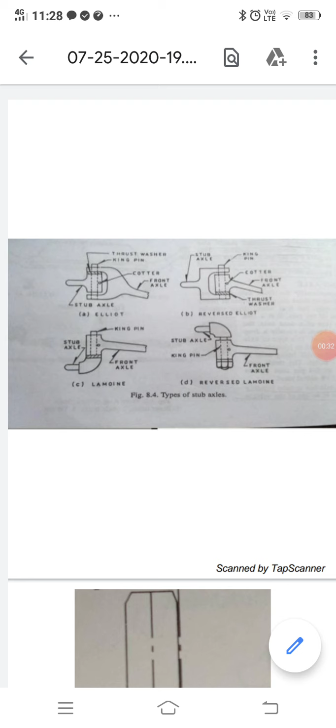Today my discussion topic is the front axle, stub axles in front axle. In the previous lecture I discussed the topic of front axle, what are the functions of the front axle, and what are the types of the front axle. But now our today's topic is basically on the

types of stub axles and also the steering geometry. Steering geometry means some parameters related to steering geometry, like camber, caster, kingpin inclination angles, curved radius, something like that.

Okay, so now today I am going to start about the stub axle, types of stub axle. So you know what is stub axle? The stub axle is basically which connects the front axle to the wheels, or front axle to the front wheels.

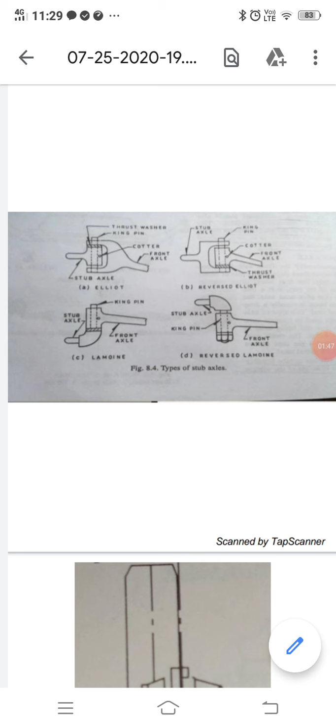So this is the function of the stub axles, main function of the stub axles, and it is not used in the rear axle. It is only used in case of front axle, and we are using this stub axle in four types. Number one is Elliot type stub axle, second one is reverse Elliot type stub axle, third one is Lamoine type stub axle, and fourth one is the reverse Lamoine type of stub axles. So these are the types of the stub axles.

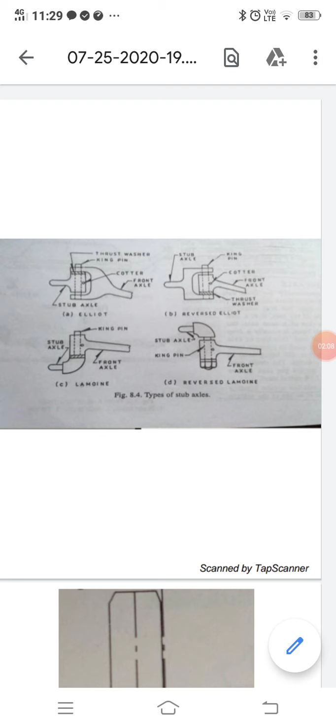In Elliott type stub axles - this is the Elliott type of stub axle - the yoke for the kingpin spindle is located on the ends of the I-beam. It is only located at one end of the I-beam, and the axle ends are forked to hold the steering knuckle extensions between them.

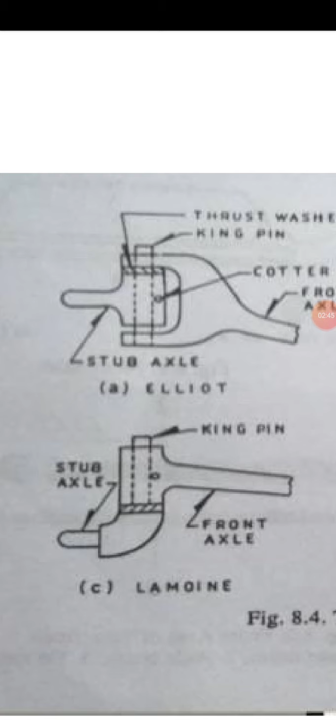And this is the Elliott type of stub axle, and this one is the reverse Elliott, just opposite to the Elliott type of stub axle.

Have you seen any difference between the two? There is some difference because of the kingpin location and also the stub axle location with the kingpin. In case of Elliott type stub axle, the thrust washer is placed at the upper portion of the stub axle, but in case of reverse Elliott type, the thrust washer is placed below. Also, in the Elliott type, the stub axle is placed in between the front axle, and in case of reverse Elliott type, the front axle is placed in between the stub axle. This is the basic or fundamental difference between the Elliott type of stub axle and the reverse Elliott type of stub axle.

The reverse Elliott type of stub axle has the spindle yoke hinged on the spindle itself, instead of on the axle. As I told you earlier, this is the difference - the stub axle is placed in between the front axle in the Elliott type, and in case of reverse Elliott type, the front axle is placed in between the stub axles.

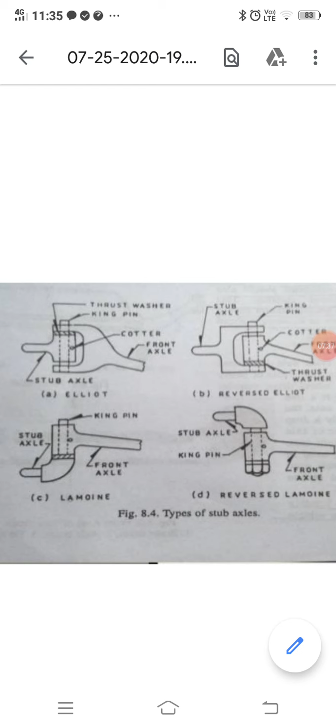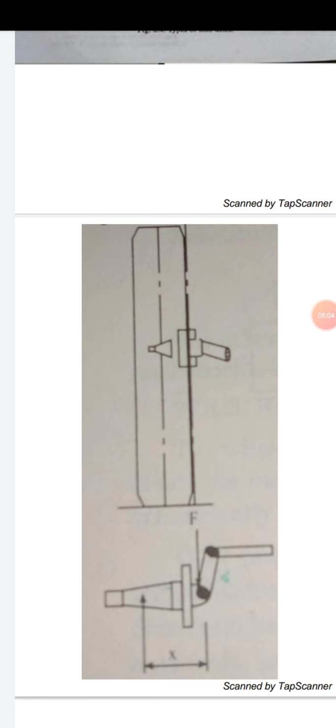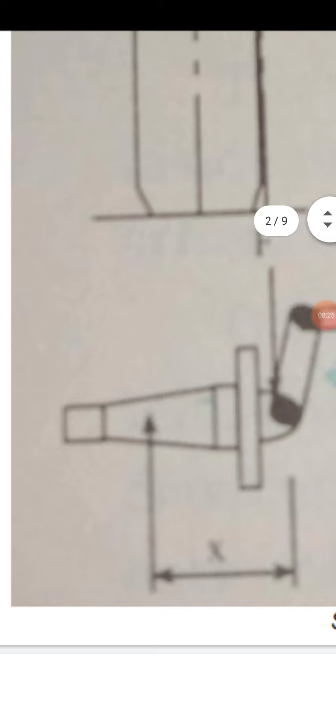Now I am going to discuss the center point steering system. From this figure you can see the vertical wheel and kingpin arrangement. This is the vertical axis of the wheel, and this is the kingpin angle, and this one is the stub axle. So these are the center point steering system.

This center point steering system has some disadvantages also, because nowadays the center point steering system is one kind of obsolete type of steering system.

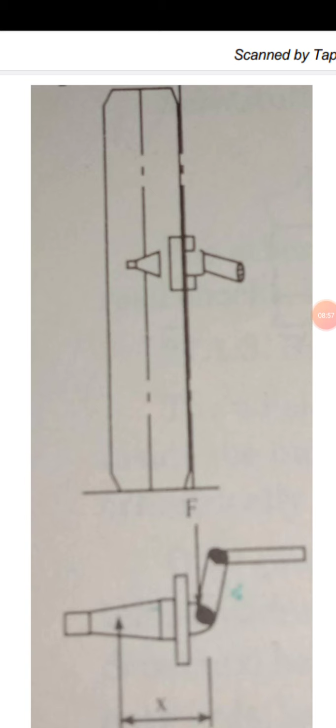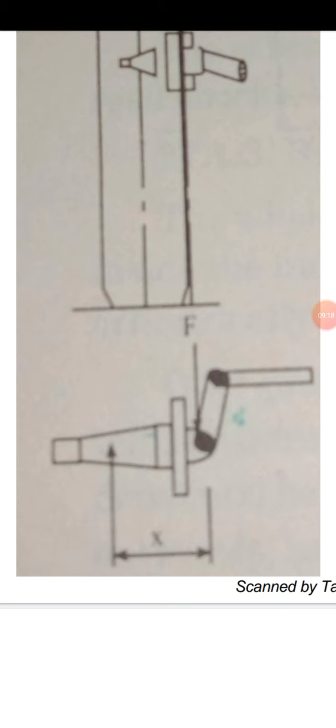The wheels are forced or pushed by the force, which is opposed by the resistance force R. This R is not captured by this picture. This is force F, and this downward force is the reaction force, or R.

These two forces cause a couple force obviously, and the magnitude of this couple force becomes very large when the front brakes are applied. In that case, a very large magnitude of couple force is generated, and this may be the cause of steering distortion or some dimensional problems, or some linkage problems may occur with the use of the central point steering system.

One more thing is that the steering wheel becomes heavy or stiff due to the distance between the kingpin and the wheel center, and the wheel moves in an arc of radius, which is denoted here by x.

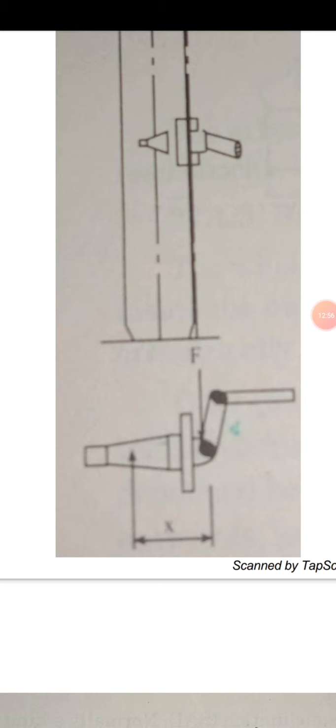So that is a very important thing. The concept of camber and caster comes from the center point steering system. So if we have to overcome such kind of problems, we have to go for camber or the caster angle. Now this is the wheel camber.

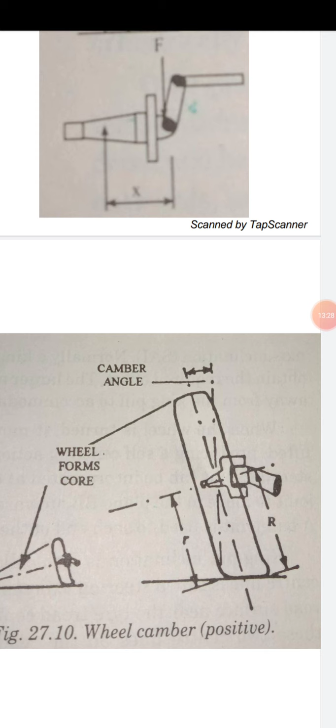What is camber angle? From the picture you can see the angle between the vertical line of the axis, meaning the y axis, and the tire center line, meaning the tire vertical line with the tire center line. This angle is known as the camber angle.

Now we will discuss more about the camber angle. If you see any car or vehicle, not obviously a two-wheeler, you can see the wheels are something tilted, but not too much tilted, not like this picture. But if you observe a vehicle's wheel, you can obviously see some inclination must be there. So that inclination angle is the camber angle.

And sometimes toe-in toe-out is also provided with the wheels, but toe-in toe-out is not a part of the camber angle. Camber angle is only considered as the vertical axis of the wheel with the center line of the wheel axis.

The offset of the stub axle tilts the wheel outward at the top, meaning it is outward at the top, not in the front. In case of the front, it will be toe-in or toe-out.

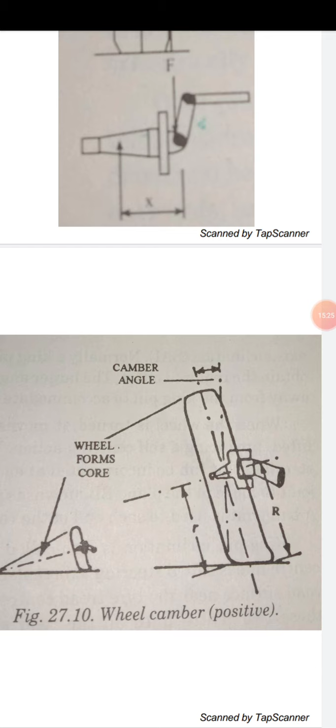There are two types of camber: positive camber and negative camber. The outward inclination of the wheel at the top, considered at the top portion of the vehicle, is called the positive camber, and inward inclination is called the negative camber.

The camber prevents the top of the wheels from tilting inward much due to excessive load or play in the kingpin and wheel bearings. Camber on any automobile is the result of front end geometry.

Incorrect camber is usually noticed due to abnormal tire wear along one half of the tread. The camber is adjustable by changing the position of one end of the steering knuckle.

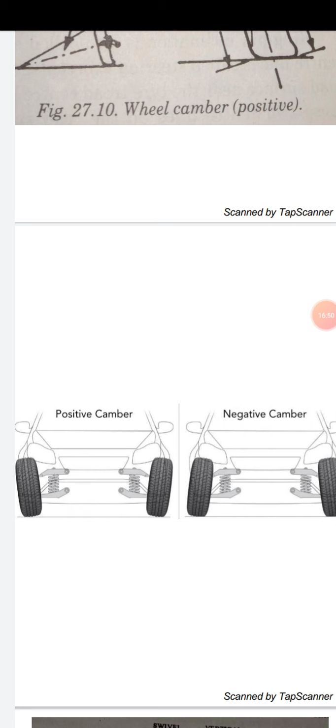There is also the bending stress on the stub axles, as I told you earlier, because bending stress is also one kind of parameter. We are using the front axle, and the front axle is basically the dead axle. In most cases, front axles are dead axles, and their only role is to absorb the load, taking the load of the front portion of the car.

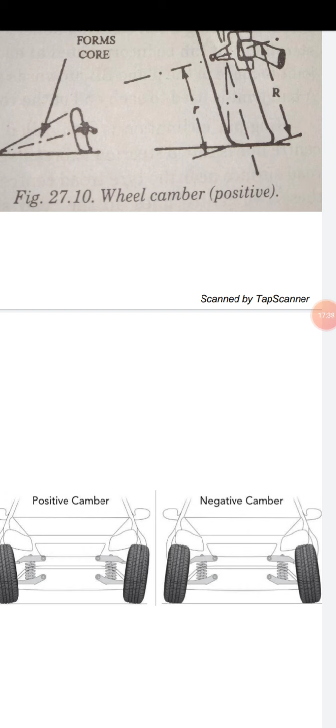So the bending stresses on the stub axles are coupled and reduced, but the different rolling radius of the tire produces a cone effect. You can see here the cone effect. It produces a cone effect which gives rise to tire wear.

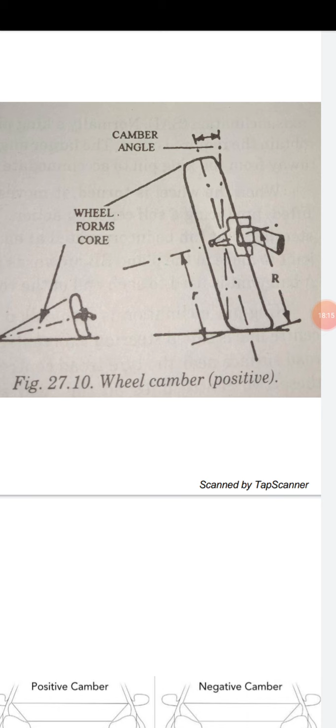And another splaying action also. Equal camber angles are provided to balance these actions; otherwise the vehicle pulls to the side of the greater camber. You have to remember that the camber angle should be equal for both wheels, the right wheel as well as the left wheel.

If it is not equal, then what will happen? The steering system or the car is pulled to the side of the greater camber angle - whichever tire is providing the greater camber angle, the car is obviously pulled in that direction only.

Okay, so this is the basic fundamentals of the camber.

Some independent suspension systems, as I told you earlier - you know that the suspension system is in your 5th module, but I taught the suspension system in your 2nd module, because I know that suspension has to be learned before steering geometry. If you don't understand suspension, what are the types of suspension, what is independent suspension, what is dependent type suspension, you cannot clear your concept on steering.

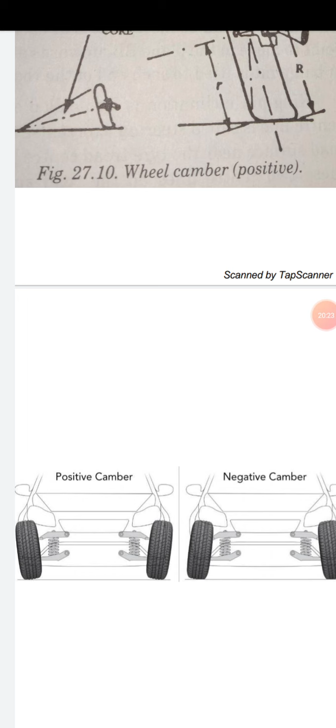Suspension linkage alters the camber angles when the suspension goes to jounce or rebound. Some suspensions have negative camber during both jounce and rebound, so that the tire tread center line follows a straight path down the road. Other suspensions have positive camber during jounce and negative camber during rebound, which keeps the tire tread surface flat on the road when going over bumps and dips.

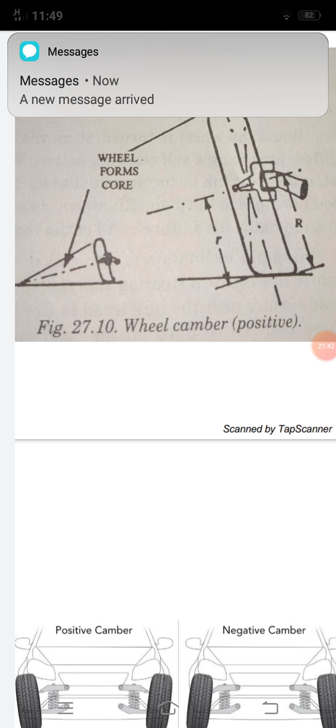And during a turn, high negative camber on the outside tire helps provide cornering power as the tire deflects under the high side load due to centrifugal force on the vehicle. This high negative camber also causes rapid tire wear, and the overall suspension camber is a compromise of these factors to provide the desired handling characteristics.

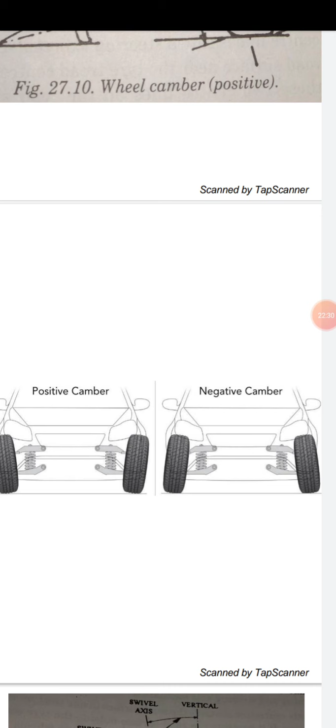One more thing about camber: it is not a desirable consideration for tire wear if the angle exceeds 2 degrees, because the camber angle should be within plus or minus 2 degrees. If the camber angle stays within 2 degrees, tire wear is not a big factor of consideration. If it crosses 2 degrees, tire wear becomes a big consideration and creates a big problem. So remember, the camber angle should not cross 2 degrees.

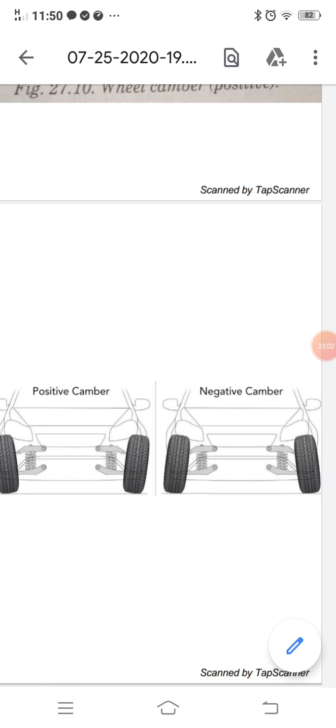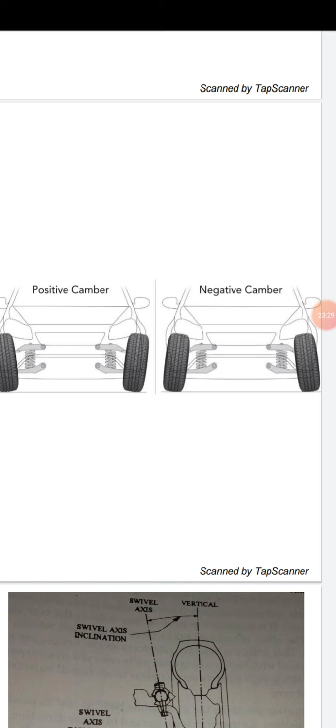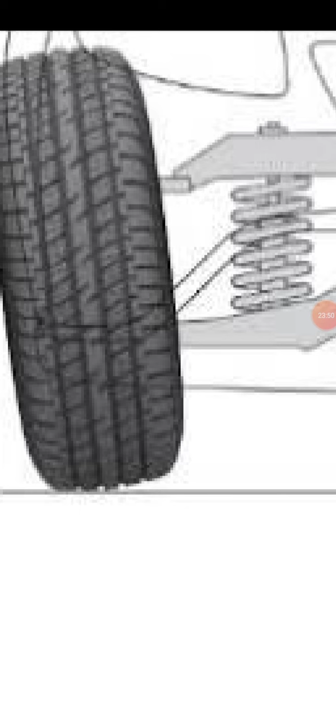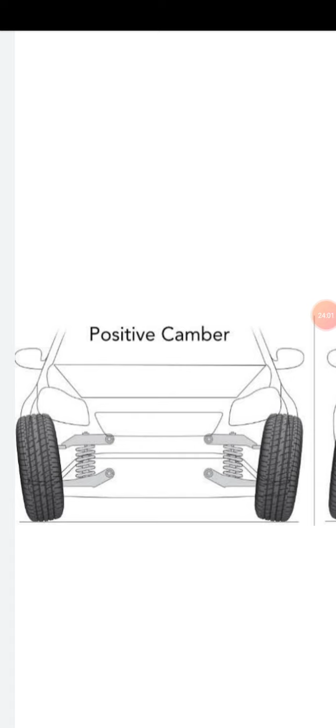An excessive camber gives some disadvantages also, which cause improper contact of the wheels to the road, because if you tilt the vehicle too much, the contact between the wheels and the road will be minimized. So we always try to keep this camber angle within 2 degrees; it should not cross 2 degrees.

Now, kingpin inclination or swivel axis inclination. Why is it called kingpin? King means boss. The kingpin is a big pin, not like a small pin - it's really big and cylindrical shaped. That's why it is the boss of all pins, the king of the pin, and that's why the name is kingpin.

What is the function of kingpin? Kingpin is basically used to attach the wheel axles, the front axle, with the stub axle. This is the function of the kingpin, and without it we cannot attach or joint the wheels with the front axles.

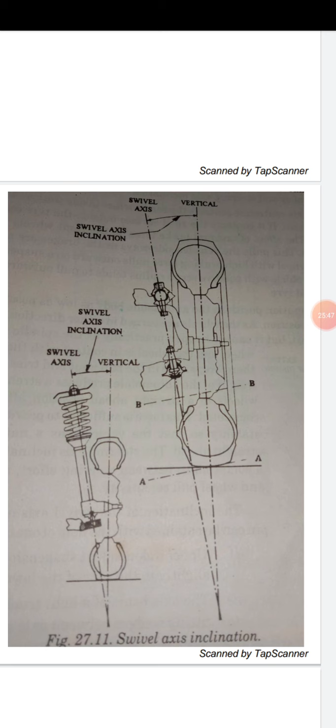If the kingpin is tilted outward at the bottom, an angle between the kingpin center line and the vertical axis is produced, as shown in figure. This is the kingpin swivel axis or kingpin axis, and this is the vertical line. This angle is known as the swivel axis inclination in case of without kingpin, and in case of kingpin, it is the kingpin inclination or KPI.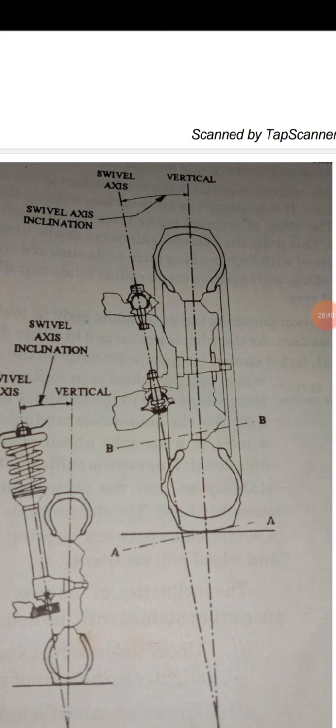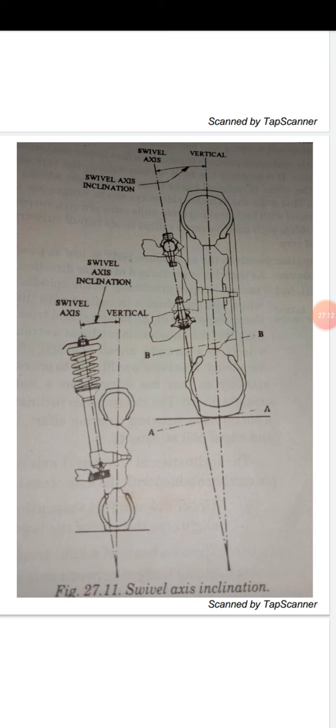Normally the kingpin inclination is between 5 to 10 degrees, generally 7 to 8 degrees, commonly used to obtain required offsets also. Larger angles are necessary in a layout when the wheel is moved away from the kingpin to accommodate the brakes and bearings. When the wheel is turned, it moves in the plane of AA, such that the front of the vehicle is lifted and produces self-centering action, which with the vertical kingpin allows a simple yoke and pin type of steering joint to be incorporated at each end of the track rods.

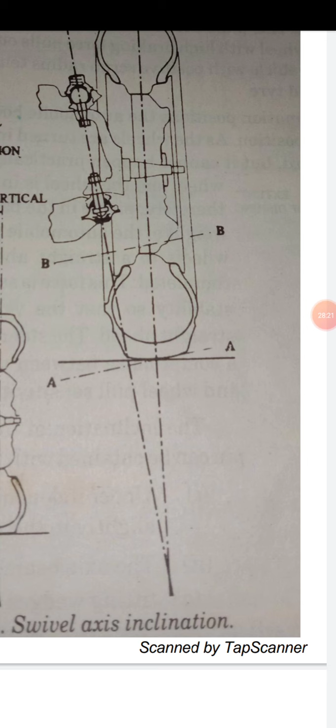An inclined kingpin allows the joint to move in the plane of the BB surface, upwards at one end of the track rod and downwards at the other. A ball joint is also used at each end of the rod to permit this motion smoothly. The kingpin inclination is also called the steering axis inclination, SAI, and the kingpin or ball joint center line is called the steering axis center line.

In the next class we'll discuss the caster angle. Today the kingpin is the last topic of my lecture.

The kingpin center line, if it extends, does not touch and contact the road surface near the tire tread center line. The distance between the point of intersection of these two center lines on the road surface is called the scrub radius.

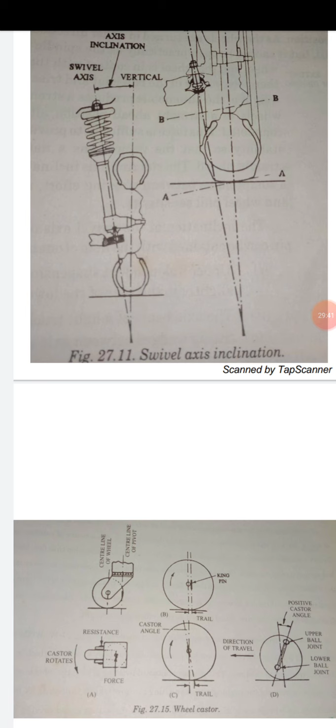In scrub radius we also have some terms: negative scrub radius or negative offset, positive offset, and zero offset. We'll discuss these topics in my next lecture. So I am ending my lecture on the topic of kingpin inclination. Okay, thank you.